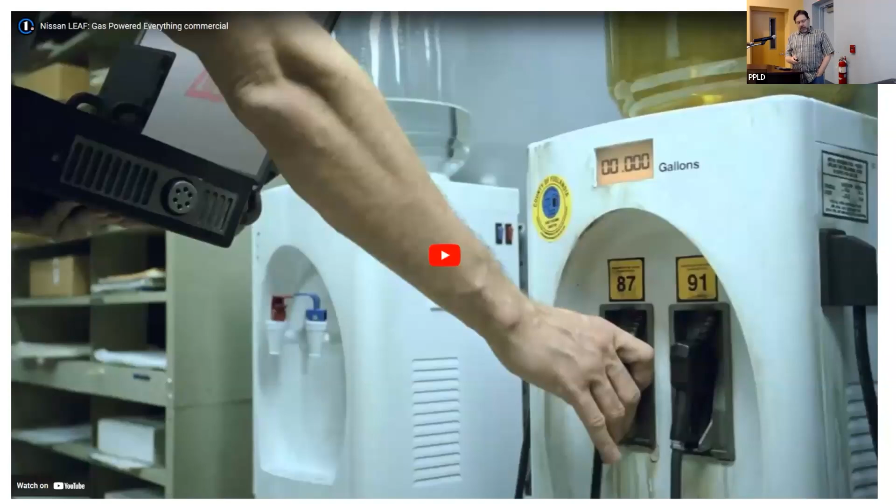The first thing I'm going to do is show you one of my favorite commercials of all time. It's from about 10 years ago, and we'll reflect on it afterwards. This is from when the first mass market electric vehicle was launched, the Nissan Leaf. They put out this pretty amazing commercial, so I'm just going to play it for you. We tested the sound, so it should work on virtual too.

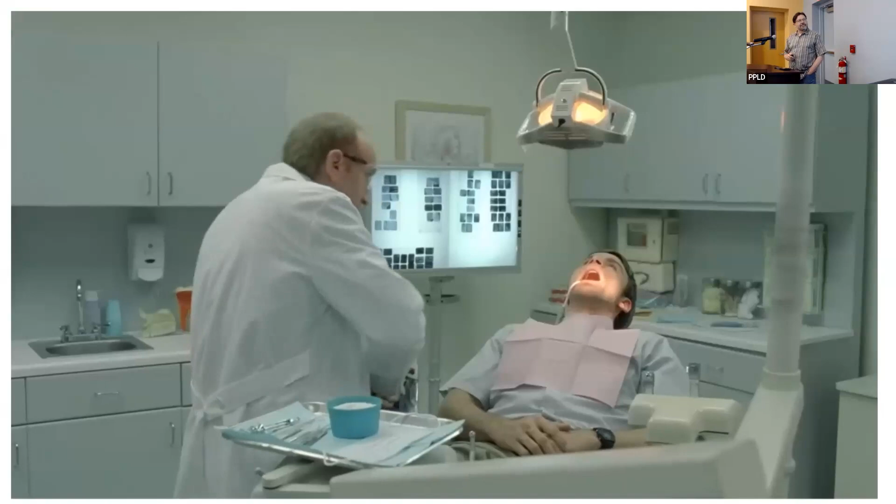What if everything ran on gas? Then again, what if everything didn't? The 100% electric, zero gas Nissan Leaf. Innovation for the planet, innovation for all.

So just some quick reflections. First off, I hope you enjoyed that, it's pretty amusing. Were there things you saw or noticed that maybe you didn't think about before until that commercial? Does anyone want to throw something out? Don't be shy. Favorite moments?

Never thought of a chainsaw as a food grinder. Yes, it's pretty good. When they're running past each other jogging and the smoke, the exhaust, is getting in your face, right? Just thinking about it, in some ways it feels sort of odd that we power so much of what we do by burning things. That's a sort of odd thing.

As we think about this kind of all-electric future that we'd like to move to, what are the benefits of that? Especially in terms of pollution that you maybe don't see all the time, that's a little more invisible but still has substantial impacts.

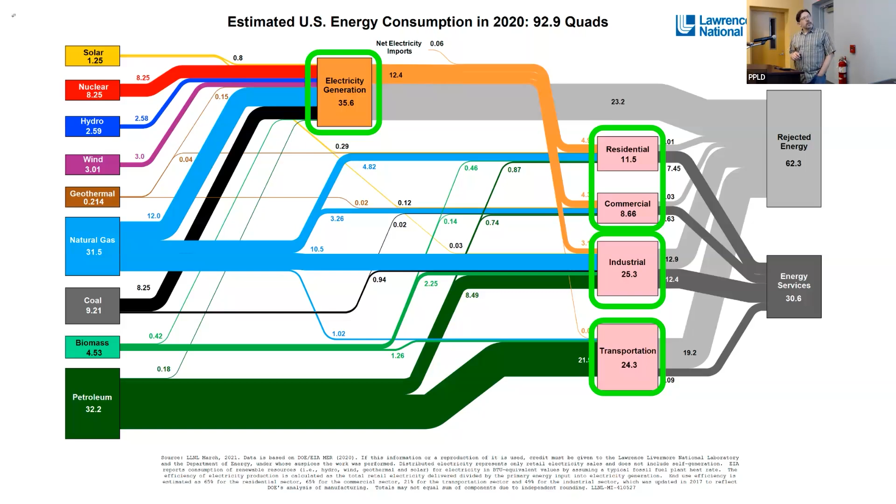What actually consumes all that energy, right? That's a big abstract map, but let's start putting what's on here. This really great group, Rewiring America, a few years ago did a survey, and what it turns down to is there are 1 billion machines in our economy that we need to replace. And what is that 1 billion machines? So that's 220 million vehicles of various types, cars, trucks, and such.

It's 98 million space heaters, so that's furnaces. It can even be like old school electric heat that should become heat pumps. There's 58 million natural gas furnaces in this country, 117 million hot water heaters, 95 million cooking machines, 35 million of those are gas stoves, 19 million gas clothes dryers, almost 2 million hot tubs directly heated with fossil fuels, as well as 5 million in-ground pools.

There are better ways to do this. It's also a very complex web. For instance, freight trains: 50% of all freight cars that move in the United States carry coal. If we stop burning coal, we actually need fewer trains, and less diesel to power those trains. The same thing is true of freight ships. They run on bunker oil, one of the dirtiest fuels that exists, but 50% of the freight ship cargo moved is oil and natural gas. So when we need less of that, we need less of the other. You get into these virtuous cycles in the process.

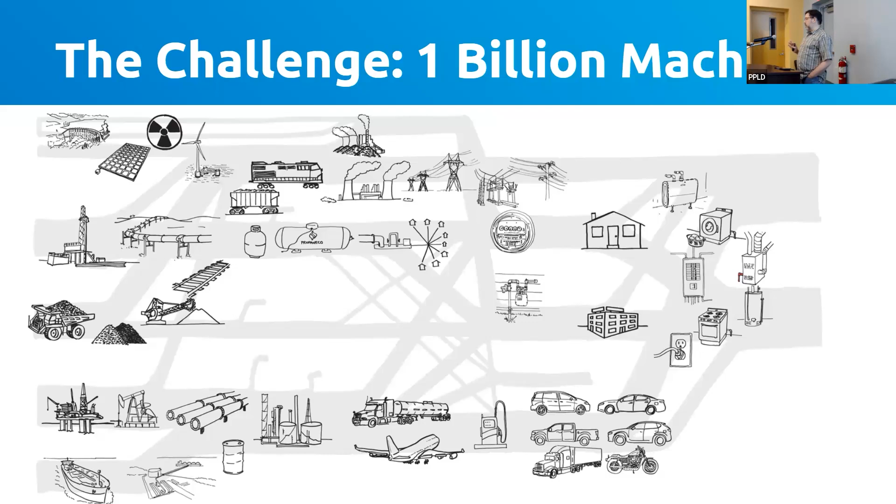So an electric future is a more affordable and abundant future. Heating and cooling your homes with heat pumps will save you on order $1,000 per year on energy costs if you're on propane or fuel oil today, possibly more. A heat pump hot water heater typically saves you about $300 a year in energy costs. They are so efficient. Every dollar spent on electricity that goes into an electric vehicle gets you about 4 times as far as the same dollar spent on gasoline in a gas car. So once you've made these switches, more money stays in your pocket every month. The maintenance and energy costs for these things are much less.

Now, the big challenge, and the reason I assume many folks are here tonight, is how do you switch? That switch has a cost associated with it, and what programs exist to make converting to an all-electric future much more affordable.

So quick show of hands for folks in the room: how many folks have heard of the Inflation Reduction Act? Good number, great. Does anyone want to say what they think the Inflation Reduction Act does? Volunteers? Incentives? Tax credits? Yep.

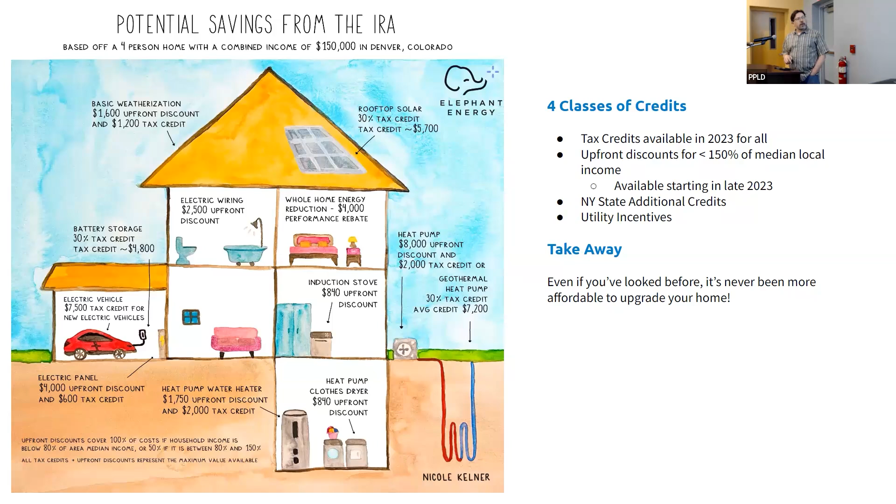What's also notable is that this is everything coming in from the federal government, but New York has incentives, and the utilities also have incentives now too. For instance, here in the Central Hudson utility zone, in addition to the incentives for heat pump hot water heaters, both air source and geothermal, there are additional Central Hudson rebates on top of that. These all stack together, so it may be much more affordable than you might have realized otherwise.

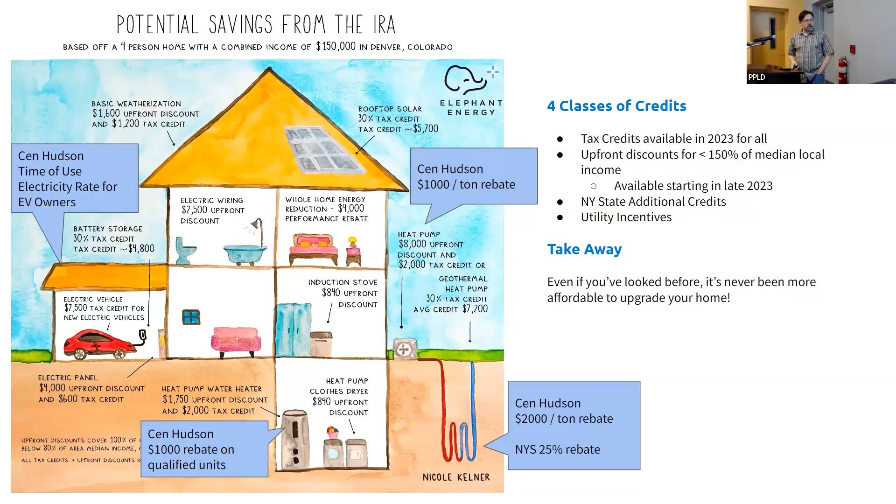So the first thing we're going to talk about is home efficiency, the IRA home tax credits, which are kind of lumped into this thing of home efficiency, but they're not just efficiency. And the important part about this is... it's complicated. Would have been nice if they made it less so.

There are two buckets, and together there's an annual limit for each bucket, and an annual limit when you put them together. The two buckets are: efficiency, which might be insulation, air sealing, windows, doors, electrical upgrades — that's a 30% tax credit up to $1,200 per year. There's also a heat pump tax credit, 30%, up to $2,000 per year for things that qualify as heat pumps. So together, you can get up to $3,200 per year worth of tax credit through this process.

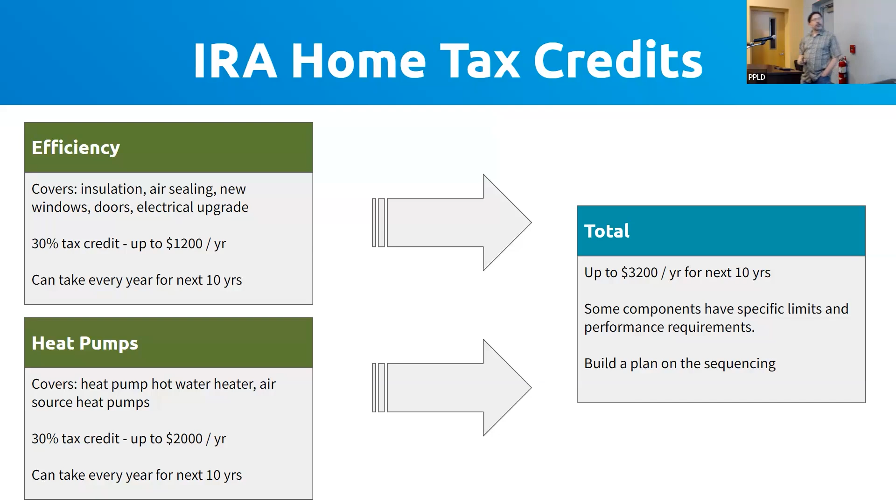There are some specific rules around each of these components and what they need to meet for an efficiency standard, but that's the magic number to think about. So it may mean there's a multi-year process you want to take to maximize this. I'll clarify, I am not a tax professional, so talk with your own tax professional or contractor when doing this, but just to give you an idea what's out there.

So in that first bucket, home efficiency, what does that mean? This covers insulation and air sealing. Turns out you lose just as much heat from your home because of improper air sealing in the attic, which creates chimney effects within the walls themselves, as you do from not having enough insulation. It also covers new windows and doors, as well as electrical upgrades — we'll get into exactly what those are in a minute. So it's a 30% tax credit on all these items.

This program has existed. Yes. Thirty percent off of what? Off of your spend to do that thing. What you spend. Okay, yes. Thank you, yes.

So this program has existed for quite some time, the home efficiency rebates. People may have looked into it in the past, but it used to come with a $500 lifetime cap. You had to keep track of, like, hey, I upgraded some windows and the windows cost $600, so I got $120 back, but I have a $500 lifetime cap, and I have to keep track of that. That is gone. Now you can claim up to $1,200 back per year, every year for the next 10 years.

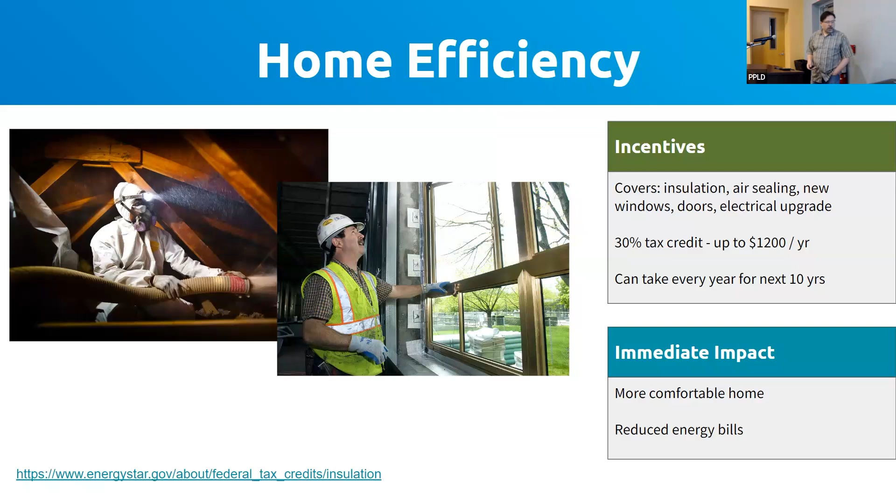Electrical upgrades. In order to support a fully electrified home, with heat pumps, dryer, electric vehicles, you are eventually going to need 200 amps of service to your home. A lot of homes in this region only have 100 amps or less. That was the case with our place that we bought 20 years ago. So the Inflation Reduction Act understands that a lot of folks are going to need electrical upgrades to their service to make it possible to add all of these new devices. But they might also need electrical upgrades within the home, some new wiring, the ability to bring 220 volt plugs to different places. That's included as another one of these home efficiency incentives, under that same bucket. So the electrical panel upgrade and overall service upgrade can be claimed at any time.

And individual electrical upgrades within your home can be claimed, like if you need an electrician to run a new 220 volt line, if it was needed for one of these other qualified upgrades, like a heat pump or a water heater.

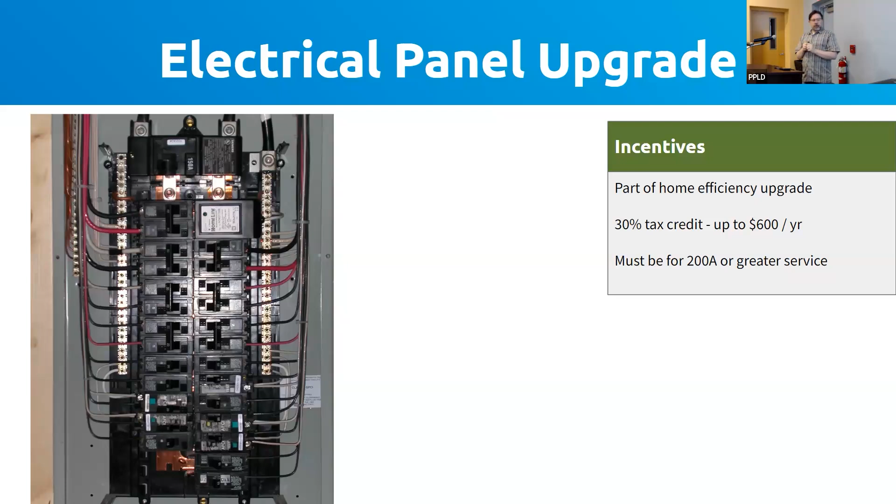All right, I'm going to dive into heat pumps next. What's a heat pump? We're going to talk about theory a little bit first, and then what are we talking about, there's a whole bunch of these things. I'll just baseline: how many folks here are familiar with heat pumps and vaguely how they work? A bunch of people, that's great.

What I will say is that in an electrified future, there's two pieces of technology that feel kind of like magic: heat pumps and induction stoves, because they do things that you're like, I'm not really sure I quite understand how that works. In the normal state of the universe, heat moves from hot to cold. A heat pump uses a magical combination of refrigerants, a compressor, and an expansion device to effectively reverse that, so you can get heat from cold and move it somewhere else.

This means you can move heat really efficiently to where you want it. This is how your refrigerator works at home, that's why you can have a cold box in the middle of your house. It's also how an air conditioner works - there's a cold side, and it's extracting the heat from your house and pushing it outside, and the outside gets warmer in that process.

But you can do that in reverse, so that you can actually extract heat from the outside on a day like today, or even when it's much colder, and move it in. And you can do this in a whole bunch of ways.

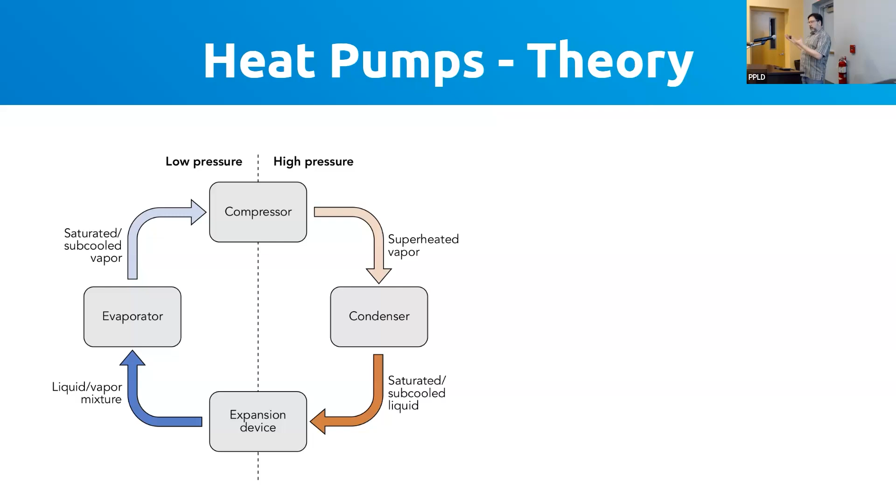So the first of these heat pumps that qualify for things under the overall heat pump bucket is a heat pump hot water heater.

The average home uses about 50% of its energy on heat and hot water. The other 50% is all the other things in your home, usually running electrically. So 50% is heat and hot water in your home. Domestic hot water—your hot water heater, the hot water for your showers, dishwasher, and laundry—that's actually typically about 10% of your overall energy budget for the year.

A heat pump hot water heater looks just kind of like a regular old tank water heater. It's going to have a 50 or 80 gallon tank associated with it, except it's got this hat on top. That is the heat pump itself, and it efficiently transfers heat from the surroundings within your house to heat that water. It can create hot water for about a third the energy of other systems. It also dehumidifies the area around it in the process, which is often a nice benefit for these things sitting in your basement. And there's no pilot light—this is all electricity.

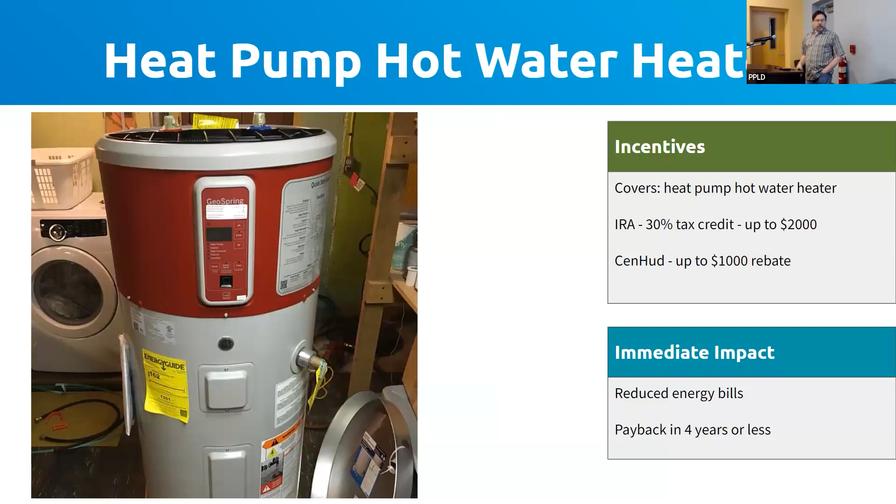So that's 10% of your energy in your house—hot water. 40% of your energy in your house is heat. How do you keep your house warm in the winter? There are two ways to do this, two kinds of heat pumps. These are air source heat pumps—either something connected into a central ducting system, or these mini splits, which you may now see all over the place.

Heat pumps have been in use in the South since the 1970s energy crisis, as they are highly efficient. But those heat pumps didn't work below about 40 degrees. And people have it in their head that heat pumps stop working at 40 degrees because that's what they may have experienced in North Carolina.

Turns out, since the 70s, things have changed—like phones have changed. In the last two decades, enormous advances have happened in this technology, so that we've got cold climate heat pumps right now that work efficiently when it's as cold as minus 15 degrees outside. And they keep trying to push this boundary—there's a new one announced just a couple weeks ago with a target of minus 22 degrees.

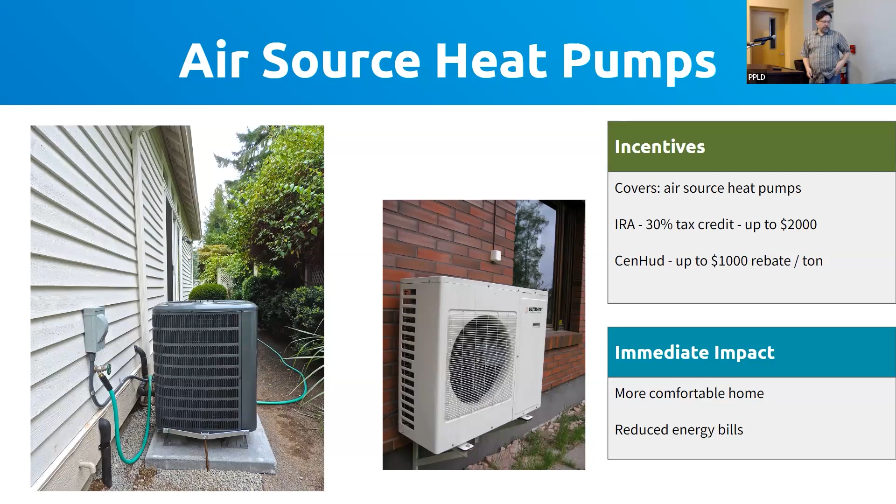So a heat pump moves heat. You can take it out of the air, either by units that connect into an existing duct system or mini split units that don't need that. You can also take it out of the ground. One of the great things about the ground is that once you get about 10 feet down in New York, it's basically a constant 50 degrees there, and there's a massive amount of thermal mass down there. It's renewable heat.

That's what we did 5 years ago, 6 winters ago, when we pulled out our fuel oil system entirely. We used a company called Dandelion, which does vertical well drills for their ground loops. They came and drilled a 500-foot well in our front yard, ran a closed pipe down there. It circulates fluid through that, extracts heat from the ground to heat the home in the winter, and in the summer can dump heat back into the ground and provide a bunch of cooling in the process.

This has been a really great, no-regret solution for us. It's much quieter, no more oil bills. When we first did this conversion 6 years ago, we were on a good bulk purchase fuel oil setup with Bard College, and fuel oil cost us like $1.90 a gallon. Even with that, we were saving on the order of $1,000 a year immediately. And now fuel oil is like $5 a gallon.

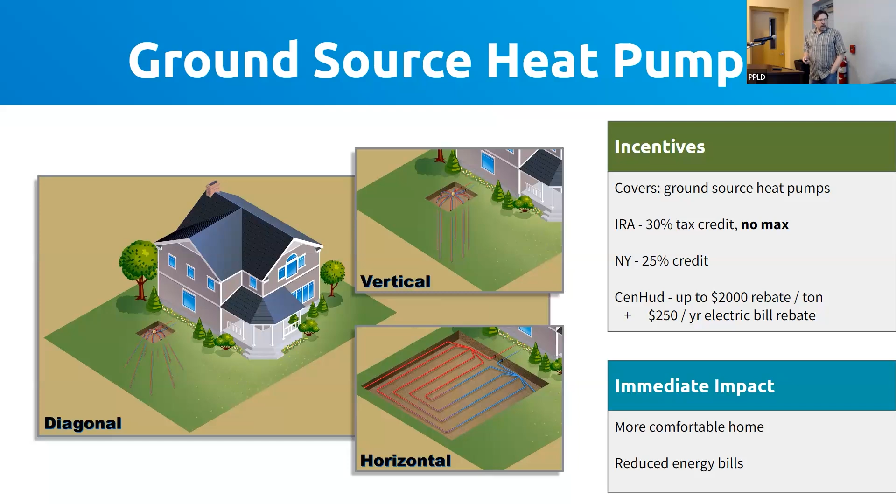So again, the big things we burn in our house are for heating the home and hot water. But some folks have other things in the house that burn fossil fuels — two specific ones you might have, which are stoves and clothes dryers.

The Inflation Reduction Act provides money for these as well, but it does it differently, in a more targeted way. It's got a rebate program, and it's income-based. This is one of the programs where the rules are being written right now — the money will be released later in the year, so this may be available end of this year or early next year at the latest. Then it will be good for the next 10 years after that.

So what does this look like? To qualify, there's a couple conditions. First, you have to be pulling a fossil fuel powered appliance and replacing it with an electric one — so if you have a gas dryer and you're replacing it with a heat pump dryer, that counts. If you already have an electric dryer, there's no funds for you. Second, there's an income threshold, based on local median income calculated at a census tract level.

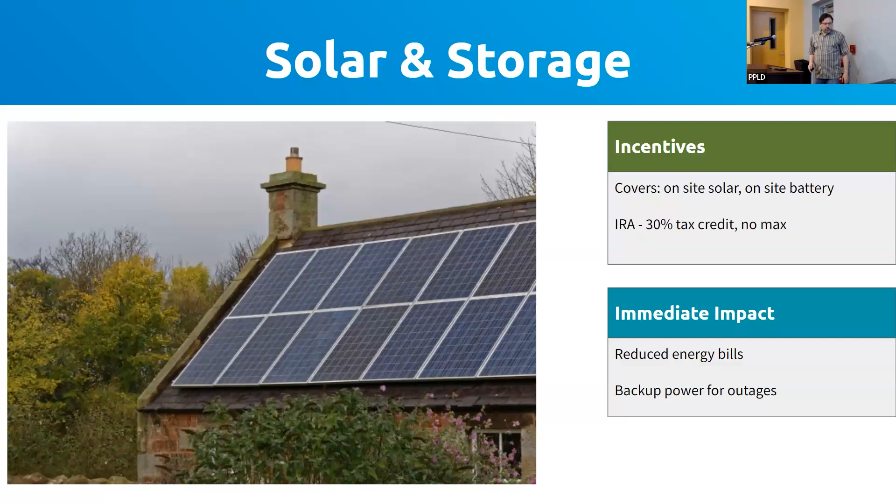So what's interesting about the storage tax credit is that this is going to bring us surprise storage in places you least expected it, because it can be its own standalone thing. It doesn't have to be with solar panels.

So there's a couple of companies right now putting products into the field that will be available by the end of the year that are building electric induction stoves that have a battery in them. And what that means is they don't need an electrical upgrade in your home. You could plug them into a 110 volt wall socket because you're cooking off the battery and you're trickle charging the battery when you're not cooking. It also means the stove works when the power goes out.

And because the battery is big enough, it qualifies for the home energy storage tax credit, and so you have 30% off this appliance. It's an interesting place where you may not expect how things are going to change going forward.

All right, electric vehicles. These at this point are cars and trucks that are just better versions of the cars and trucks we have today. They're quieter, they accelerate faster, they drive smoother, they cost less to drive and maintain. Every car manufacturer that exists has committed to making electric models. Many have given dates about when they are shutting down creating gas cars. That may be in the 2030s, it may be in the 2040s. But they've all said, we are out of this other market. So it's a great time to start looking into the possibilities here.

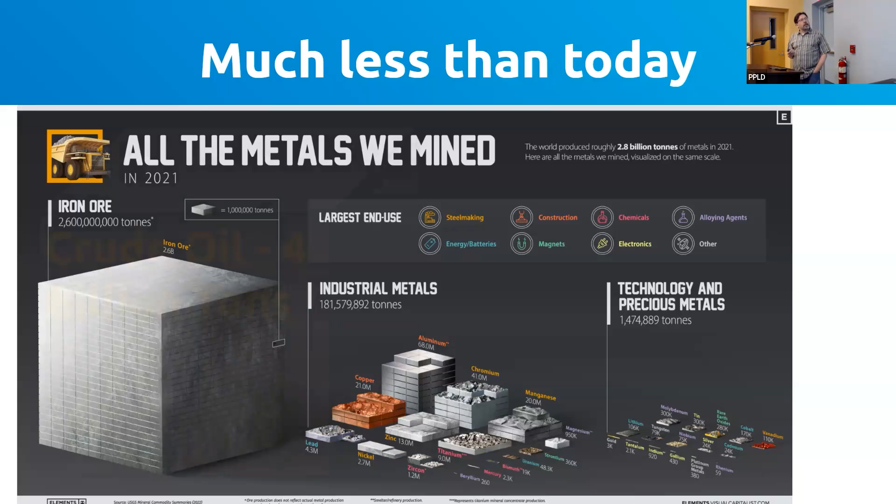The metal we mine the most of is iron. Lithium is over here somewhere—can't quite see it from over here. Lithium is right here, and that'll need to get a little bit bigger. But the important thing to compare: in 2021 we also extracted 4 billion tons of crude oil, which we burned and put into the atmosphere, and 8 billion tons of coal, which we burned and put into the atmosphere.

We still have to mine and extract things to get to a clean energy future, but those things, once we pull those metals out of the ground, are highly recyclable. After about 30 years, we're going to have enough circulating in the economy that we won't have to do much more with them, because we don't burn them, we use them.

So, the future that we make. I firmly believe this clean energy future is inevitable—that we're going to get there one way or another, because it's cheaper, healthier, more resilient. But there's a big difference in well-being depending on how fast we make that transition.